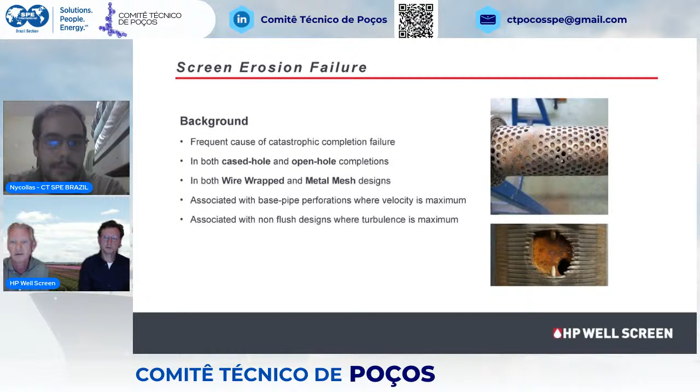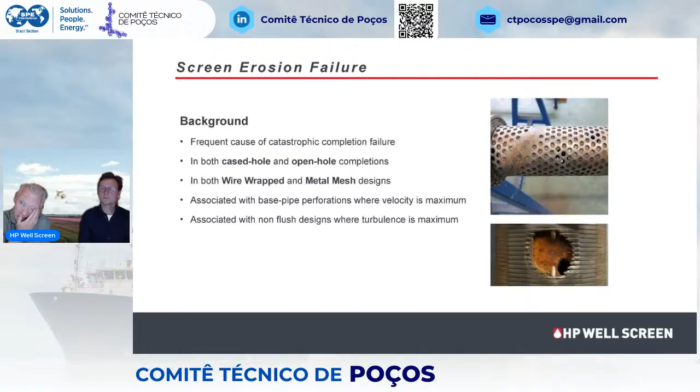It's okay. Thank you. So what we see here is a wire-wrap screen, and just below we see the base pipe with a perforation. And same here is a metal mesh screen where the erosion starts around the holes in the base pipe. And it is kind of logical, as you get localized flow, and with localized flow we get an increase in velocity, and erosion is a function of velocity to the power 2.6, 2.65. Okay.

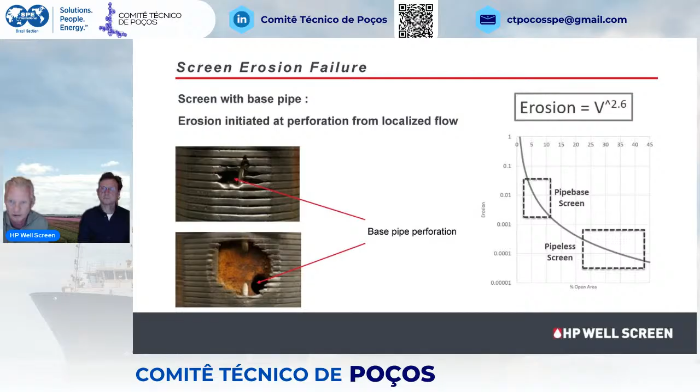This is an example of a North Sea operator, high rate gas wells. I showed you this picture before, but if you strip down the screen and open it up, you clearly see marks and holes in the base pipe that are worn out. By this concentrated flow, we get an increase in velocities in the screen section, doing the damage. So we have been addressing these erosion issues.

Where we have identified velocities concentrated around the hole, and how to deal with that, we have come up with two different designs. The first design is a screen with a base pipe, for larger diameters, for open hole sections, where we are shielding off the hole in the base pipe. By shielding off the hole, we are creating a flow path around the hole, and with that we are using more surface area, and by using more surface area, velocity comes down, and with that you have a lower erosion rate.

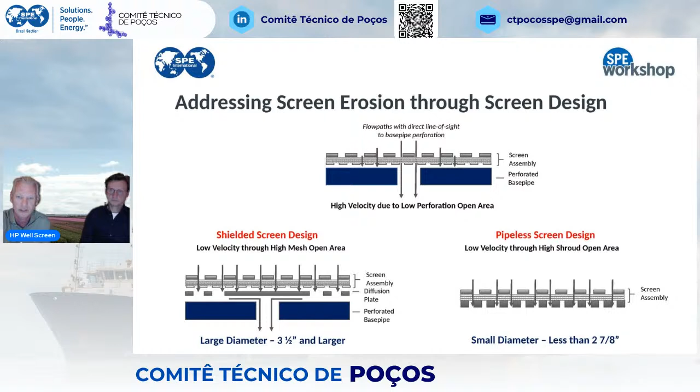Now, we went through quite an extensive development process, and with that we did extensive testing, both fluid and gas, in full scale, big setups. We have tested mainly coupons, 4-inch coupons, like I said, with different rates in fluid and in gas, accelerating the erosion, but still we wanted to identify what the cause of the erosion is.

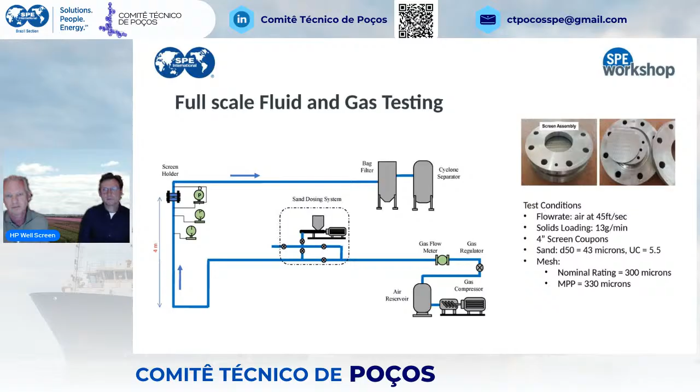And what we have seen is that actually erosion is not from outside to inside, but it's mainly from inside to outside, where I showed you the concentrated flow around this hole in the base pipe. Erosion really starts at the highest velocity, which is closest to the hole in that case, and then it's eating outwards. It actually bounces back from the base pipe towards the screen. Okay.

So with these designs and this testing, you would think we could easily harden a metal, and with that find ourselves a solution. That's correct, but it's not the full solution. In our case, we have been testing nitriding, boron, and diamond treated metals, both wire wrapped and weave. And indeed, this is something which we use, but in combination with a pipeless design or the shielded design. We mainly use boron at this moment because it's the best balance between cost and performance.

And what you can see here is a cross cut of tiny wires of a metal mesh screen, and you see nicely a 25 micron layer around the wires, meaning the outside is hardened. It's not a coating, it's really an infusion of the metal, but the wires still stay ductile, which we need, otherwise everything would break. There's no peeling or delamination. It's not a coating. It's the metal which is hardened. Okay, sorry.

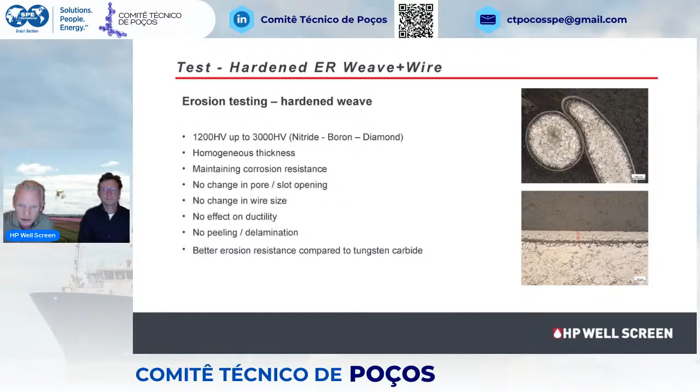Where would this be put in? To put this in perspective, a normal screen is 316L. Here we see the hardness of different materials, thickness, where 316L is around 300 HV. Your formation sand lies around 1100, and in this case the harder material survives and the softer material wears out.

Now tungsten carbide, which you might know, is around 1700, whereas the boron which we use is over 2000 HV. And depending on the base material, 316L or 825, it even goes up to 2500 HV. And then the metal is not wearing out; it's more the formation sand that is the weaker material. Okay.

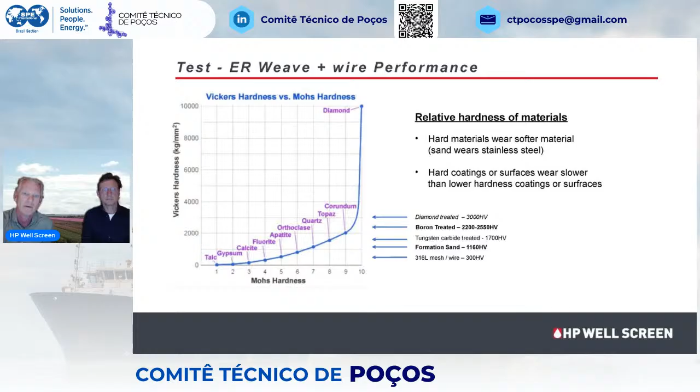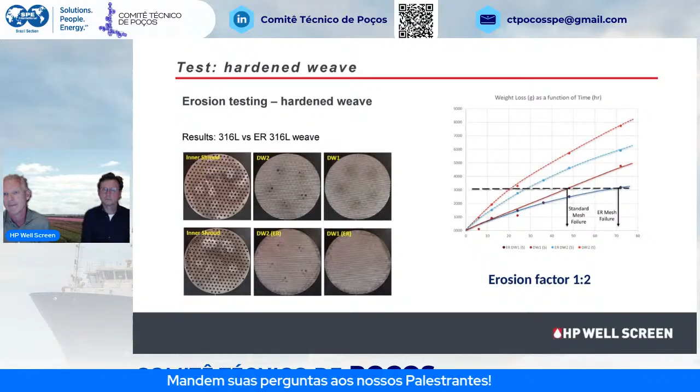Like I said, this is not the final solution. From the testing, the hardening of a weave or a wire from a wire-wrap screen will provide you a factor of 2 extra in lifetime, which is directly linked to weight loss from your erosion. So anything you do in mitigating these erosional issues is buying yourselves more time. Yes, you're extending the lifetime. But as soon as you are building up your sand layer, you are protected.

So it's actually a question of how much sand is there, how much sand is stopped, how much sand are we producing. Up till you have built a layer, you're protected. But in this case we are presenting an erosion factor, meaning the additional lifetime compared to a standard screen. And in the pictures on the top side, you can see the wear on the holes in the base pipe. You see 5 dots, and on the lower part you see these dots are less, and this is with the hardened weave. So you see there's less erosion, and both are on the same timeline.

So this is from the lab testing with the 4-inch coupons, where we have used a base pipe, and this base pipe has 5 holes. And then you clearly see this concentrated flow around the holes in the base pipe. This is resembling an open area of around 7%, which is kind of a standard base pipe open area.

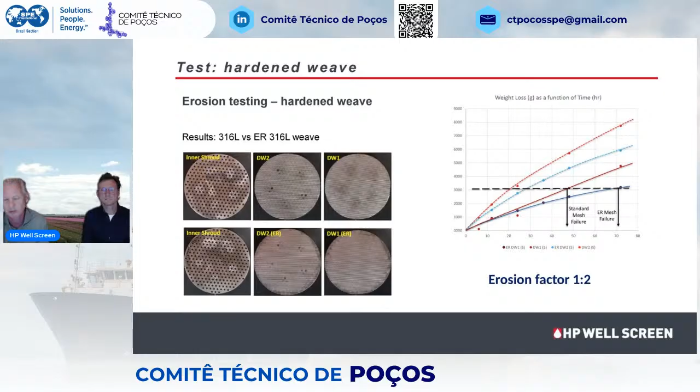Towards the pipeless design for Thru-Tubing applications, what do we do there? Like I mentioned, we will remove the base pipe. Can you do that? Yes, you can. This is a metal mesh screen, and a metal mesh screen has an outer and an inner shroud. If we increase the thickness of the outer and inner shroud, we are adding wall thickness. We are removing wall thickness here, strength, actual strength for installing and maybe pulling out, but also wall thickness for collapse and burst requirements. So by increasing the thickness here and there, we are gaining a lot of strength.

And if you would look at the thicknesses, are you in millimeters or in inches? I don't know. It's like, how much are we there? 7 millimeter total what we could gain. A pipeless design, again, I've mentioned it before, is used for Thru-Tubing applications. So these are the smaller diameters normally. This is not to be used, of course, in a long horizontal section.

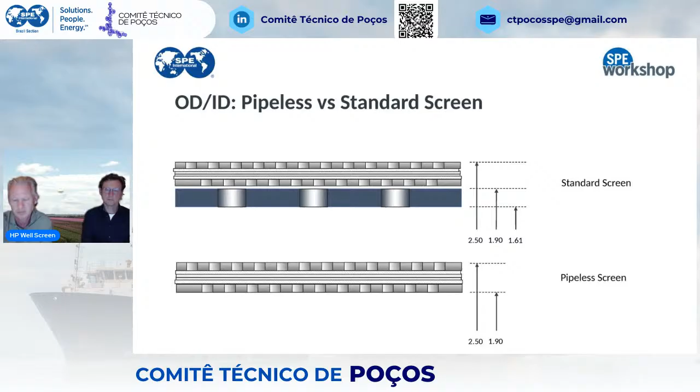Okay. Now this we have been testing as well. What do we see here? Weight loss again. In comparison with your standard base pipe, you have seen the holes on these test samples. Measured here and presented here is the weight loss. And in this case, we are presenting the specific erosion. So that's the erosion against the amount of sand that is produced through the screen. And your normal screen would have, let's say, 23 grams per gram sand. This is to the power

-6, of course. But if we compare the standard screen with the pipeless screen, including the hardened weave in this case, we are not at a factor of 2, but we are at a factor of 7 times better than your standard screen design. And that's quite an achievement. And that also comes because the open area with the base pipe is lower than the open area with just a screen. And then we have added the hardness from 300 to 1200. And that combined makes the higher erosion factor. This testing was not with the boron, by the way. This was with nitriding.

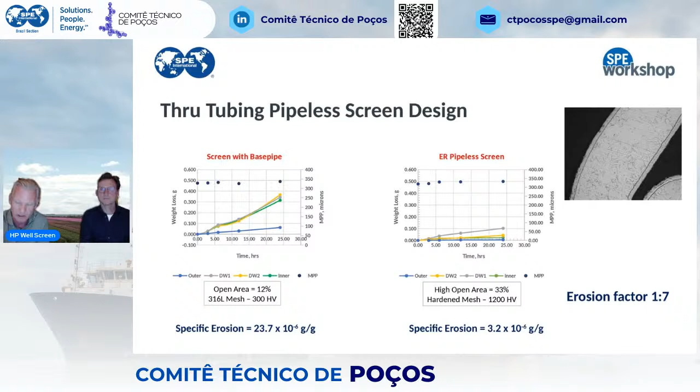Okay, and the other solution, not Thru-Tubing, but let's say in case you would have an open hole completion, open annulus with the potential risk of annular flow with a high influx close to the heel, doing your erosional damage closest to the heel. You could think of doing gravel packing, but in case the gravel packing is not feasible or maybe not economical, you need something else, something that would fill the gap between a normal screen dealing with the higher flow rates. And we think this shielded screen could fill that gap.

Again, a picture of concentrated flow, normal screen design. And in here we are introducing a shielded plate going over the perforation section, the hole in the base pipe. What it does, again, it's redirecting flow, and by redirecting flow, it's using more of the surface area of the screen. It's not just this side, but I will show you in a minute on CFD what we have done. It's using more surface area, and with that, again, velocity drops.

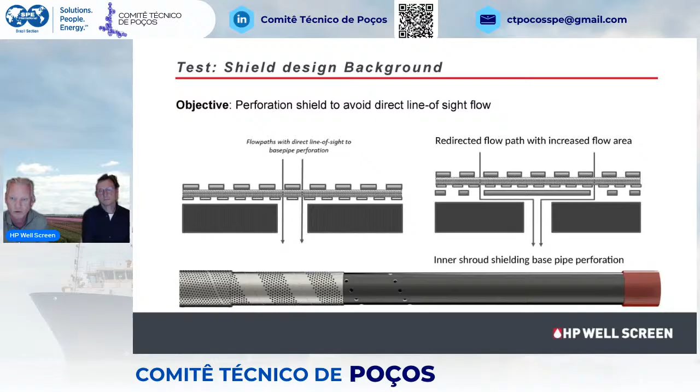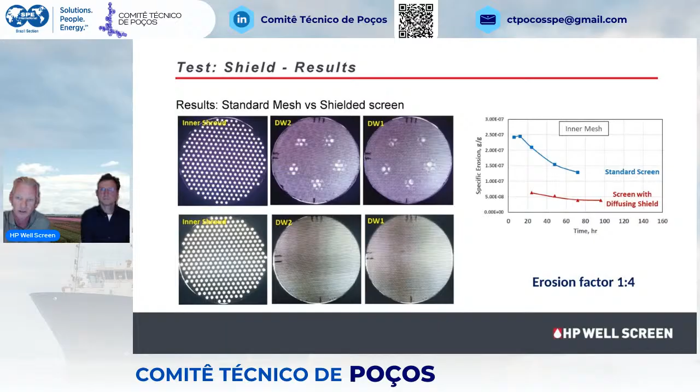Somewhat similar pictures, which you have seen before from the testing. Shield in this case, and in here standard screen. Again, specific erosion, weight loss against the, let's say, produced sand. And in here, comparing the standard screen design with around 7% open area on the base pipe, again, we have a factor of 4 in favor of the shielded screen design.

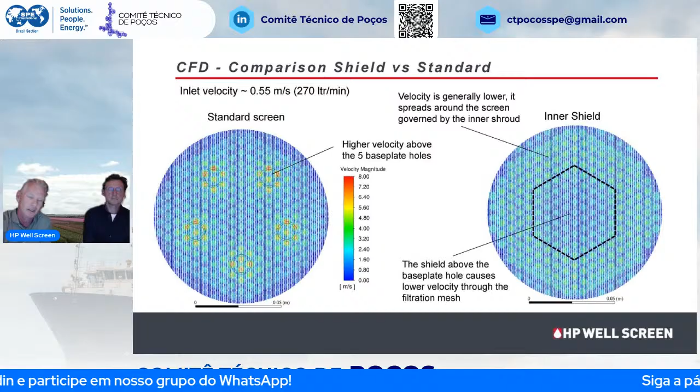Now we have done CFD to also understand and maybe to show what's really happening in this case. We have mimicked the testing, the lab testing, full-scale testing. There's a big setup which we have used. We have mimicked that with CFD to see if there is an alignment between lab testing and CFD, and with that, if we could use CFD to predict erosion. The answer is yes. Here we clearly see the same pattern as on the lab testing, with the red presenting the highest velocities.

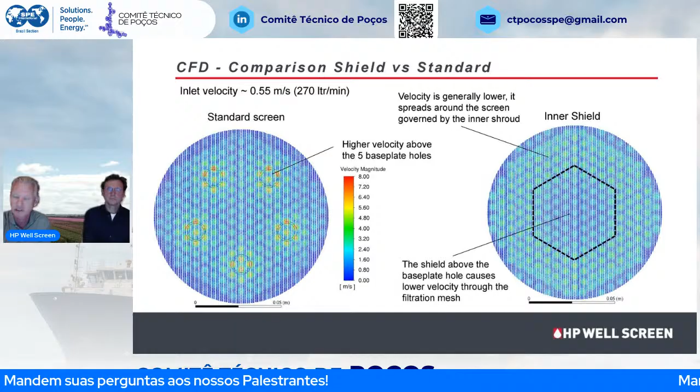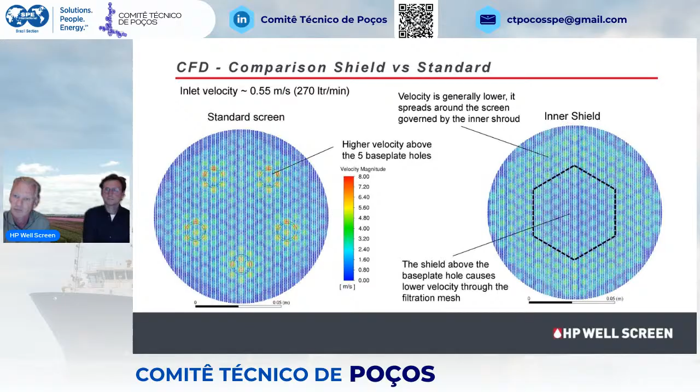And now here in this area we have used the shield with the one hole below, but here you see a nicely distributed velocity, and this is what I meant with a more distributed flow using more surface area, which gives you, let's say, a more moderate velocity.

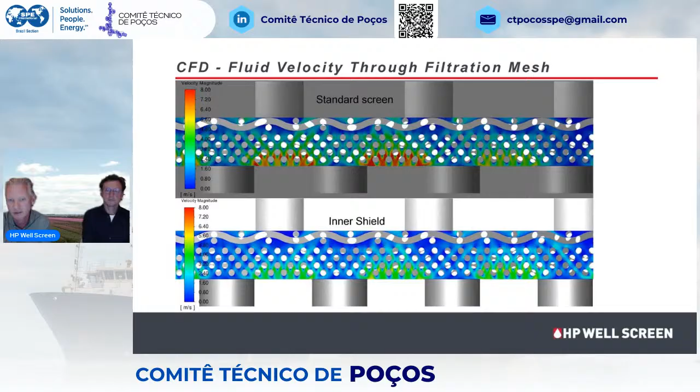If you would take that into a square cut, what do we see here? Metal mesh screen, outer shroud, inner shroud. This is your standard screen design compared to the shielded screen design. Again, outer shroud, inner shroud. Here on top, we see the drainage layer, and here we see a double, which is an overlay, a double weave, Dutch weave. These red sections are the high velocities just above the holes in the base pipe. Where here you see a far lower velocity, and this is providing us the achievement in erosional strength.

What we've done here is we have linked the weight loss, erosion, or let's say modeling within CFD to the actual lab testing, and we see quite a reduction in mass loss. The actual testing is providing the same outcome within CFD as the lab testing, so it's quite realistic what we achieve from the CFD.

You see the blue lines, the dotted and the straight line. The one is CFD and the other one is the lab testing. And again, you see somewhat the factor of 4 difference between the shielded screen design and the standard metal mesh screen.

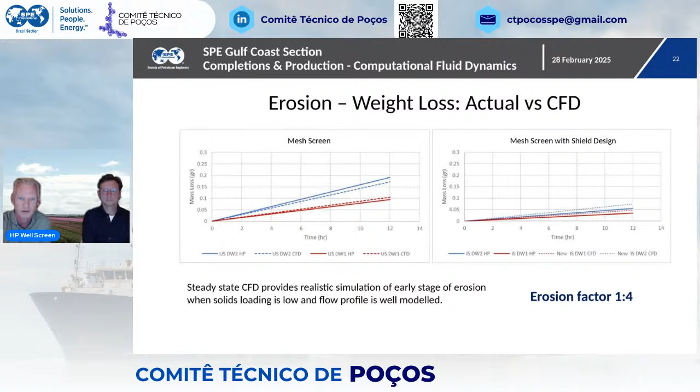If we take that into account in the actual erosional reduction, this velocity distribution over the screen section, using more of the screen section, would even go from 1:4 to 1:6, comparing the shielded screen design with a normal screen design. So again, not comparing the screen but comparing the completion, it's even functioning better. It's more like somewhat an ICD in a small area.

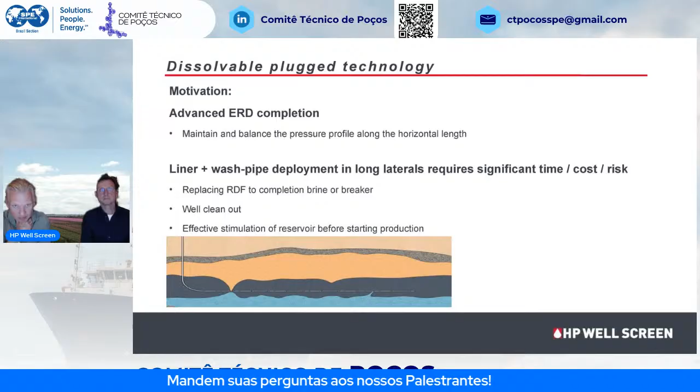Our dissolvable plug technology. I think it's 10 years ago, we got some questions out of Abu Dhabi, where they are drilling longer and longer wells, ERD completions, where they were facing quite some issues. We got a question at that time from Zadco, Exxon, if we had done something in the direction of using small-hole ICDs, where without any intervention we could open the ICDs. And the answer was yes.

We did some developments at that time in Germany, and we continued the discussions. With these long horizontal sections, they were facing issues in displacement of fluids, which of course you could solve by using a wash pipe. But on these long sections, the wash pipe was the issue, in weight, in time, in risks. They wanted to remove the wash pipe, be able to do displacement, place a breaker, open up the nozzles, and start either injection or production.

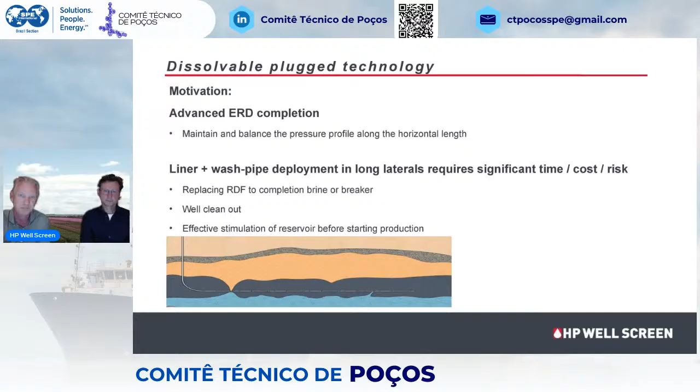So we came up with our DPNA, dissolvable plug nozzle assemblies, where we replaced what they call LEL, limited entry liner, with these nozzles, which is your standard ICD nozzle. But in this case, we plugged it off with dissolvable material. Now you could think that's easy, but it's not so easy. The dissolving part is simple. It's the part where it needs to stay closed for a long time.

So in 2018, we did some trial wells. This was quite a success. They drilled the fastest well ever, and on these rigs they could save quite some time. We entered into quite an extensive testing program with Exxon and came up with a commercial design, where we are pushing the length of the liners further and further, and we are over 50,000 foot today.

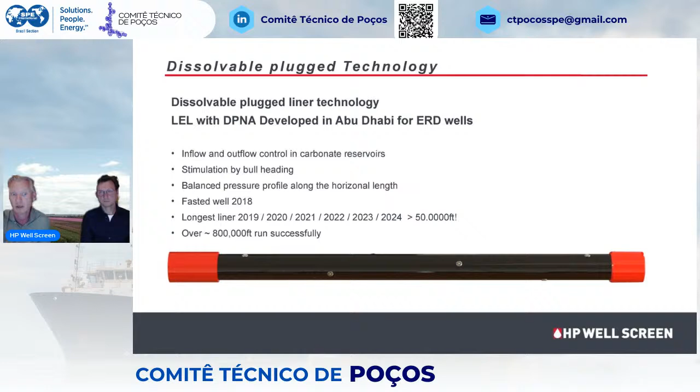And as I said, it's quite a success. We have run quite some footage already over time. And we see now not just the really long wells adapting to this technology, we also see some of the shorter wells benefiting from quite a simple but robust design.

As mentioned, we have quite a track record with it, but we also did quite some development in this direction. Again, CFD, flow performance, integrity, all the erosion, which came along with this development. And the majority today is still run with ADNOC, but we are using this in the North Sea, West Africa at the moment, quite a lot. And I think in Brazil they have used something as well, but not the materials we are using.

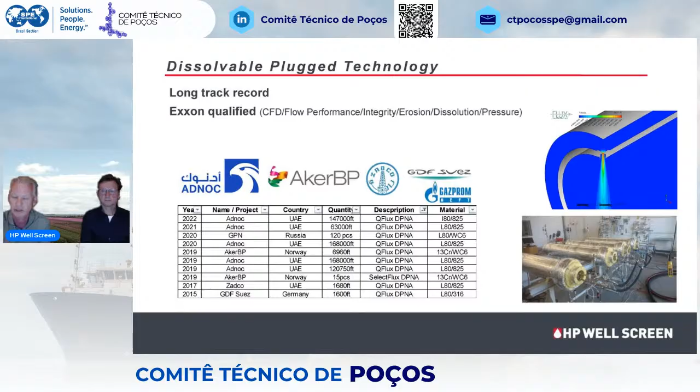So what are we using? Like I mentioned, an ICD, a nozzle, small hole, which is filled, but we have 6 different grades which we work with, and we also have combinations of the different grades. And why would you need more grades? Well, not every well is the same, and with that, the fluids and the fluid programs are changing.

So we have materials that can dissolve in water, brine, oil-based mud, or acids. And the acid is, let's say, the simple part. It's the other fluids, especially with the higher pressures and temperatures, which are the challenge, not just to dissolve, but to maintain integrity for a longer time before opening up.

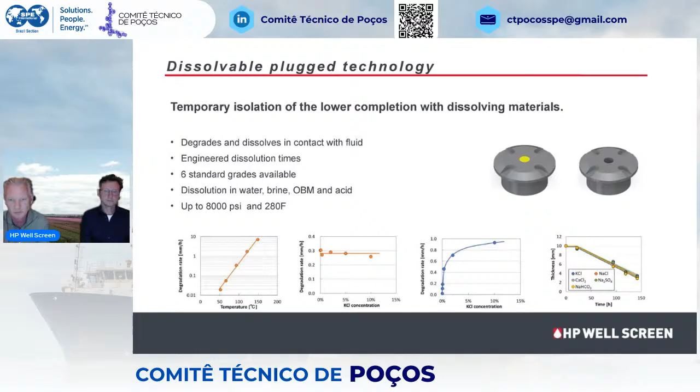So this nozzle is actually a standard ICD, which could be used in an axial direction as well, or in a radial direction, in combination with your screen. And here it's providing the same advantages. You are eliminating the inner string, which again saves you time, cost, but also the risk that comes with it. You get a good cleanup, a good coverage, let's say recovery of your oil-based mud. It has quite some advantages.

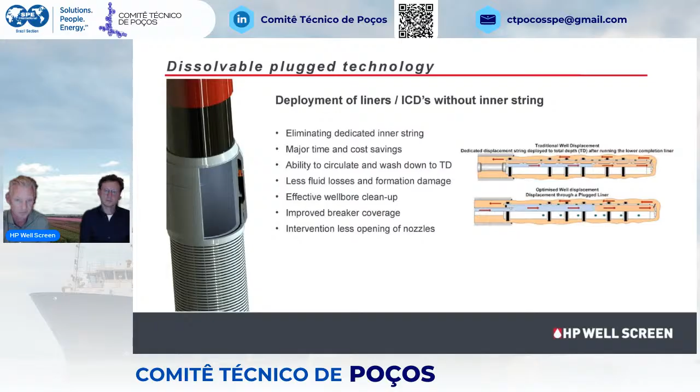You could also think of a different way, not in long horizontal sections for ICDs. We have quite some wells now in West Africa where they have somewhat slanted or more vertical sections, different layers, packers in between, and in this case, they want to pressure up the liner, set the packers, but then have selective production in between the packers. You could do this with sliding sleeves, of course, but a simple and proven method now is to go with dissolvable plugs, where in this case quite some big ports are opening up.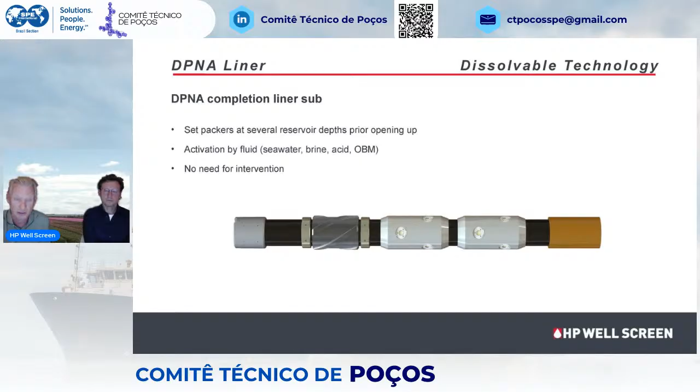So in this case we are not introducing an ICD function. We are introducing big plugs, providing quite an open area in a short joint. And again, it works the same. Same materials which are used here.

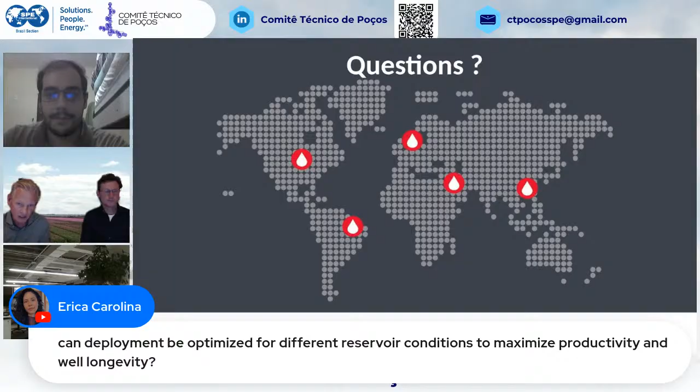Okay. Of course, if you have a mature field and sand problems are coming with the maturing, you have to do something. And this could be by remedial sand control. But in that case, if you have an open hole, you can introduce a screen, but most of the time it's a cased hole, perforated cased hole situation, and then you get challenges how to install a screen in a cased hole application.

This is providing you most of the time erosion or headaches, and then a screen which we have shown today could provide you a somewhat longer lifetime. Is that always the cure? It could be, but it can also be that you are producing for half a year, and then the screen is gone. Also, it's a good screen, it's still half a year. We have seen that in the North Sea, production of half a year, and everybody's happy. But then sand is still coming.

It's eroded. So the designs which you come up with, you need to think about retrieval. Get the screen out of the well in full, not that it breaks, because then you can run a new screen and continue. That could be a modus for all the wells where you cannot spend too much money, but still with a simple method of installing an erosion-resistant Thru-Tubing screen and extend the lifetime of your well. And this is what we have seen a lot on gas, but also oil wells in Europe.

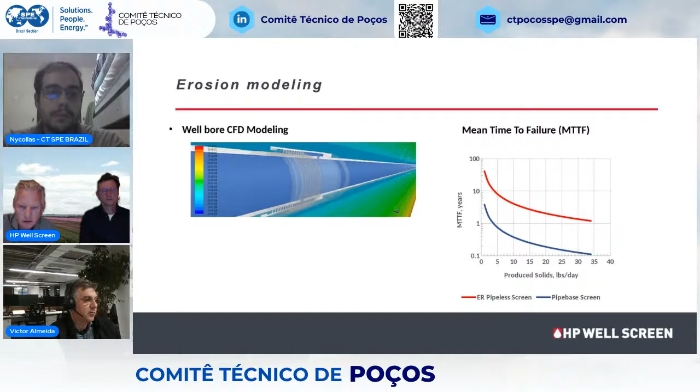Based on your answer, here in Brazil it is more common to use nipple profiles of 3.5 and normally 2.75 inch, right? Is there any limitation for OD that you recommend to use or not? That is a good question.

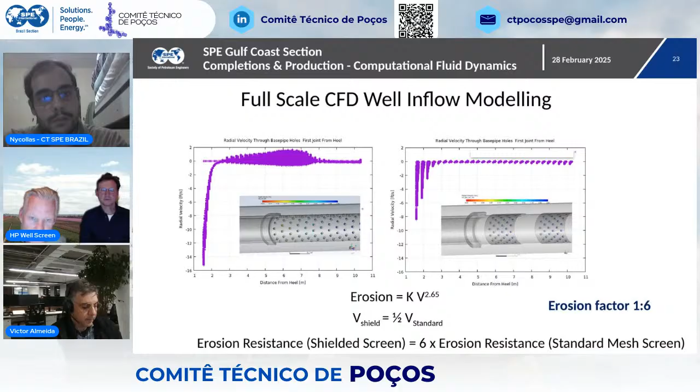With a standard screen, of course, we have a diameter of the base pipe where the screen is built over that OD, where you are fixed. In this case, we have full flexibility. We can build any diameter if we skip the base pipe. We just manufacture the shrouds towards a specific size.

And in that case, if we need a 2.44 inch OD, we will build a 2.44 inch OD for whatever nipple profile you have, where you're confident with, let's say, an 1/8 or maybe a 1/4 inch clearance to pass the nipple profile. So any diameter from 1 inch approximately, up to maybe 3.5 inch maximum in diameter. Okay.

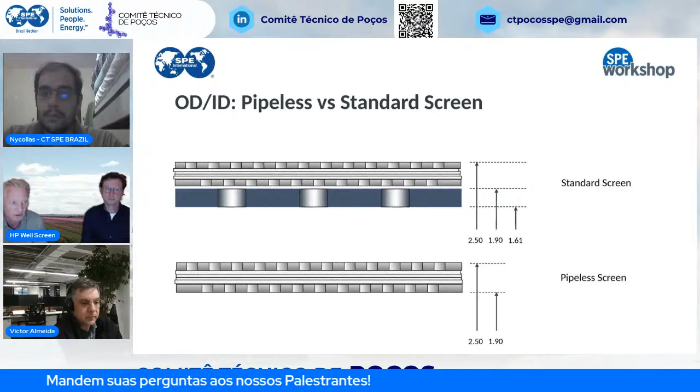But in the case your formation is somewhat heterogeneous and you're not able to, let's say, select the right pore size, in that case you would be producing sand, where, yes, you have to think of maybe protecting yourself with more erosion resistance in terms of screen selection.

Or it could also be that your formation is somewhat bimodal, and fine sand is continuously produced through the matrix from these higher flow rates in the vertical section, so you are also continuously producing sand. And also in that case, you need to think of a screen design. But in all other cases, when you're stopping sand, there is no risk, in my opinion. As long as there is no sand produced, erosion is not there. Okay. Does that answer the question, or did you mean something else?